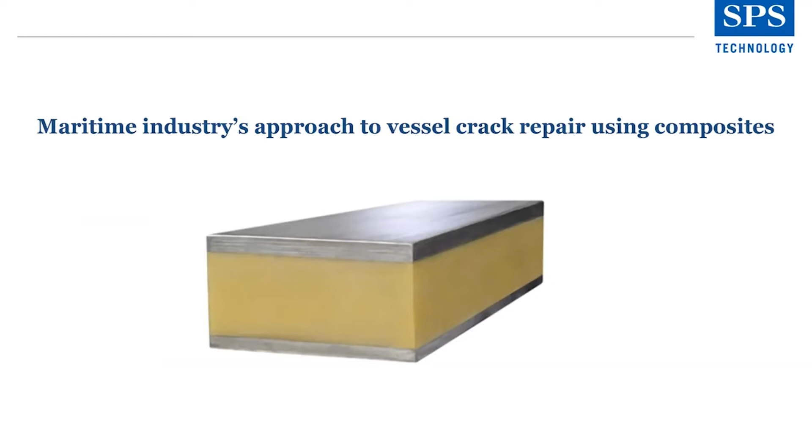Maritime industry's approach to vessel crack repair using composites. Structural maintenance on vessels is growing both in terms of demand and complexity. This requires a new innovative approach and an overhaul of decades-old approaches to vessel crack repair to unlock cost, time, environmental, and safety benefits. Repairing the cracks present on a vessel's critical structural components forms a key part of structural maintenance, which preserves asset integrity, ensures seafarer safety, and safe passage of cargo.

The global shipping fleet is aging. New stress points are emerging on existing vessel structures as a result of retrofitting and refits, work that is vital in prolonging the life of the vessel and ensuring cost-effective compliance with environmental regulations. These factors mean the demand for structural maintenance, including crack repairs, is greater and more complex than ever before.

For many years, gouging and rewelding or crop and renewal techniques have been used to address cracks on vessels. While effective, the process involves extensive steel renewal, which is costly, time-consuming, and comes with heightened risk and time out of service. With the average age of the world merchant fleet continuing to grow, as of last year on average it was 21 years old per vessel, there is likely to be increased scope for structural repairs to address vessel cracks, with associated costs and time out of service both key concerns.

Time out of service relevant to cracks in this presentation talk about hull or fuel tanks specifically. We'll examine how the combination of these factors suggests an overhaul is required in the maritime industry's approach to vessel crack repair. While repair techniques have remained static for many years, structural composites offer a cost-competitive alternative that's fast, non-disruptive, and delivers improved strength compared to conventional steel structures.

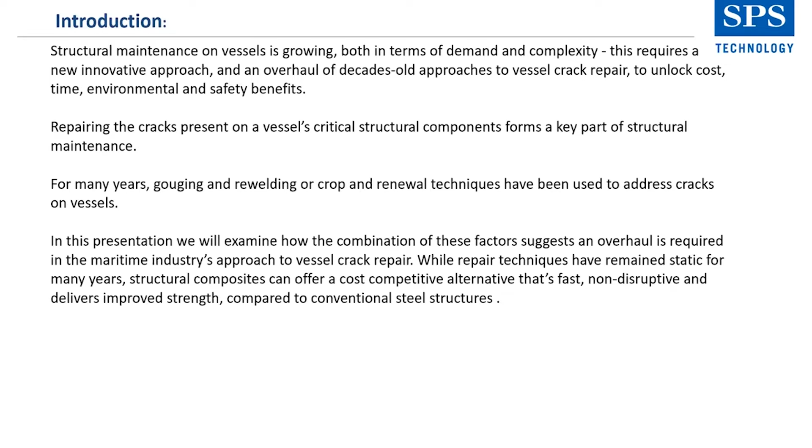There's three types that I've identified here on the slide. One is a temporary composite wrap repair. Damaged ships and offshore pipe structures can be repaired and protected against the effects of erosion, corrosion, and deterioration, using a wide range of polymer composites. This technology has been used in temporary composite wrap repair and maintenance of metal products since the 60s.

Temporary composite patch repairs feature an application of carbon and glass fiber mixed with epoxy resin or adhesive to the damaged surface. By curing, the resin hardens and permanently bonds to the surface, impregnating the fibers that reinstate the strength of the damaged part. This creates a solid new layer of material that provides full water tightness. These repairs have been around for probably about 35 years.

And then we've got the sandwich plate system, which is a fully class-approved permanent repair, strengthening and upgrading solution that has been used on marine structures for over 20 years. With SPS, two metal plates are bonded by a polyurethane core.

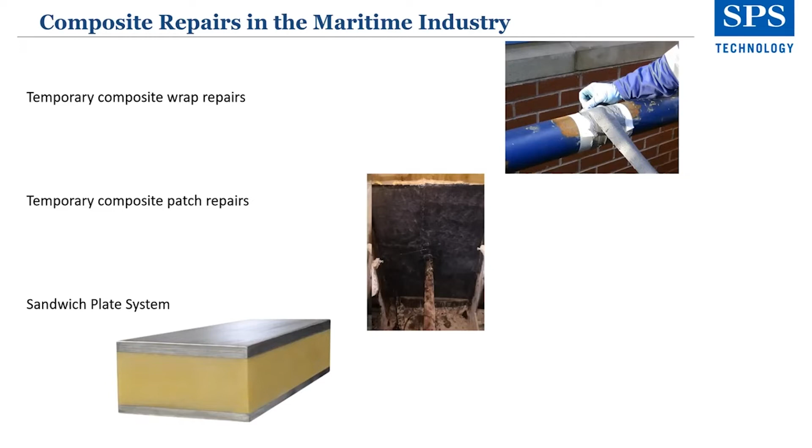Steel ship structures can develop cracks as a result of their all-welded construction or material imperfections, loading conditions, fatigue, and corrosion as they operate in highly corrosive environments. Welded ship structures are susceptible to damage during its construction and operational life. Design inadequacies, material selection, material imperfections, improper welding, incorrect fabrication, or poor workmanship are some of the probable causes for damages during construction, while fatigue and corrosion are related to operations.

These damages primarily manifest as cracks in the ship structure, either immediately after fabrication or launching, or in due course of time. Crack formation or initiation appears inevitable or unavoidable, given the uncontrolled variables involved in constructing a welded ship structure, along with other factors, including the use of high tensile steel strength. So, where do cracks come from? Cracks can develop during the ship's construction stage.

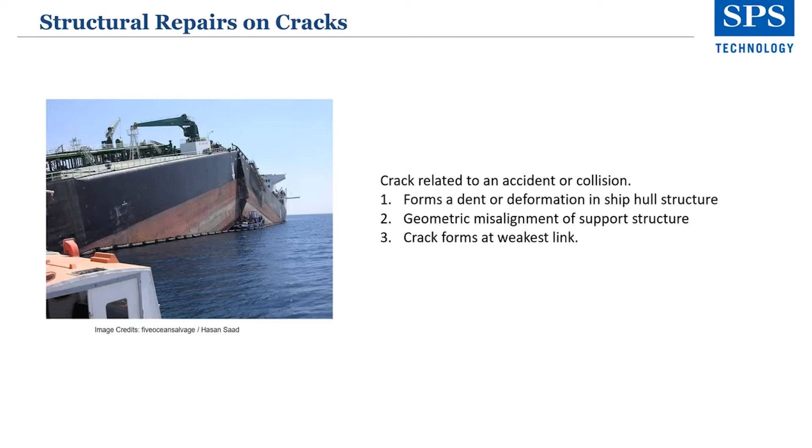The normal procedure followed once cracks are detected during inspection is that they are gouged and rewelded, followed by non-destructive examination. Okay, so we're going on to the problem with side shell cracks as an example.

Ship structures are subject to cyclical stresses due to wave pressure, ship motions, and loading conditions during operation, so fatigue is an important design criteria while designing and building ships. The science of cracks is really important as well, for forensic investigators and class surveyors.

For instance, on the slide you can see the defect crack locations are in the aft portion of the hull of this vessel, which was the original section. So this is a vessel that's been lengthened. Backing brackets were not installed in way of the side shell during the conversion or new build. On the left-hand side image, you can see where the transverse bulkhead meets the longitudinal side shell, cracks have formed. The cracks originally appeared at the bulb collar plate weld connection on the aft side of the bulkhead.

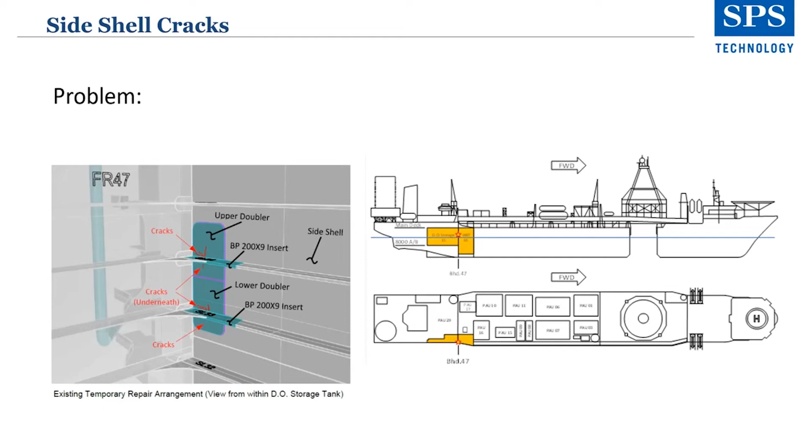Backing brackets were fitted during the repair, and an existing temporary doubler repair was put in place. As you can see here, these are photographs of where the crack has formed through the longitudinal stiffener attached to the side shell. The cracks were drill stopped in the side shell to stop propagation.

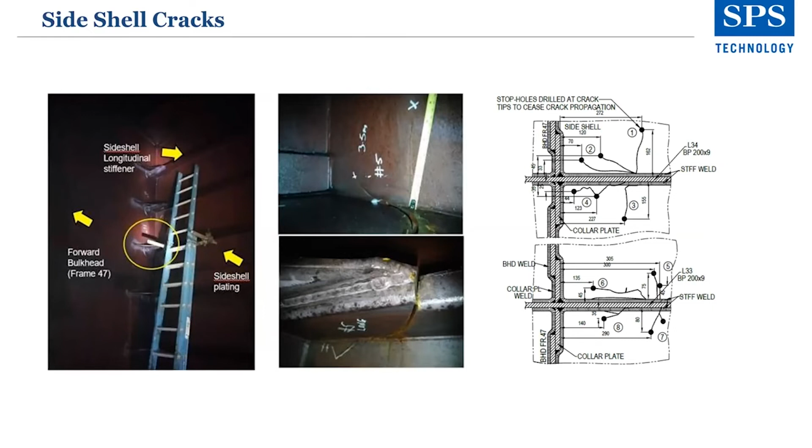So how do we go about repairing cracks in the side shell? With an SPS solution, as you can see in this image, the doublers were in place with a new longitudinal sectional stiffener. On the outside, to stop the ingress of water through the cracks, a Miko Patch was applied.

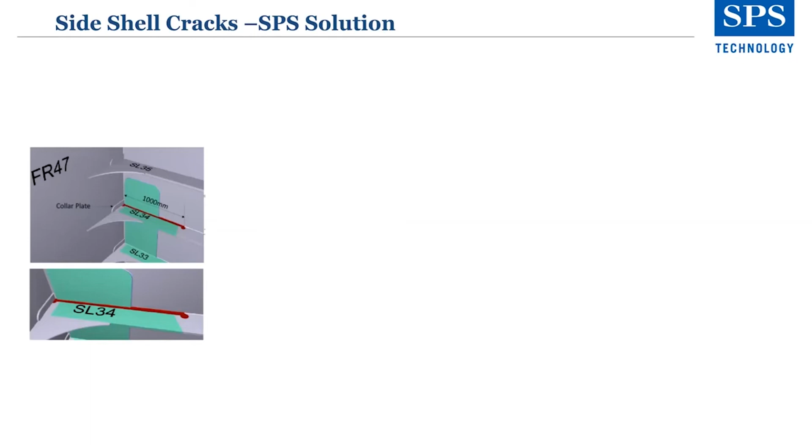Then we marked out on the longitudinal stiffener a line to be cut to try and remove the doubler to gain access through the temporary solution, to assess if the cracks had grown since the temporary solution was put in place. So we removed the upper doubler plate and lower doubler plate.

In the center images, you can see we removed the wooden bungs that were in place at the aft end of the crack arresters. We fitted new brass plugs and trimmed them flush to the side shell plating. We then ground the cracks to create a smooth open profile.

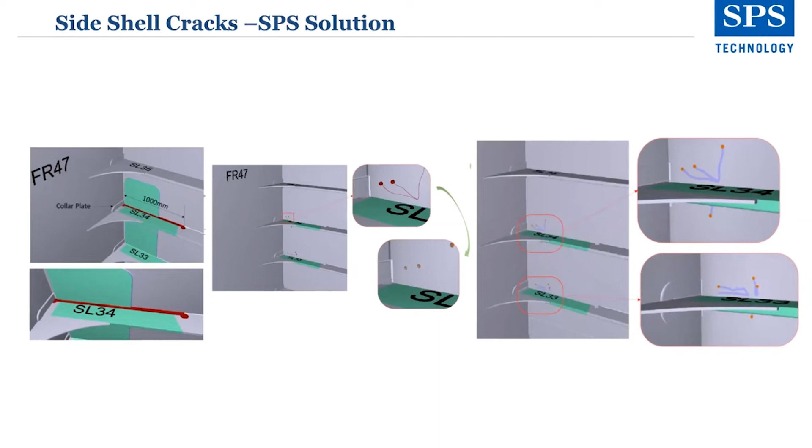After which, looking face on to the side shell from the inside, you can see over 3 bays, as we call it, where the cracks are identified in orange, and the new stiffener section has been removed, as denoted by the green.

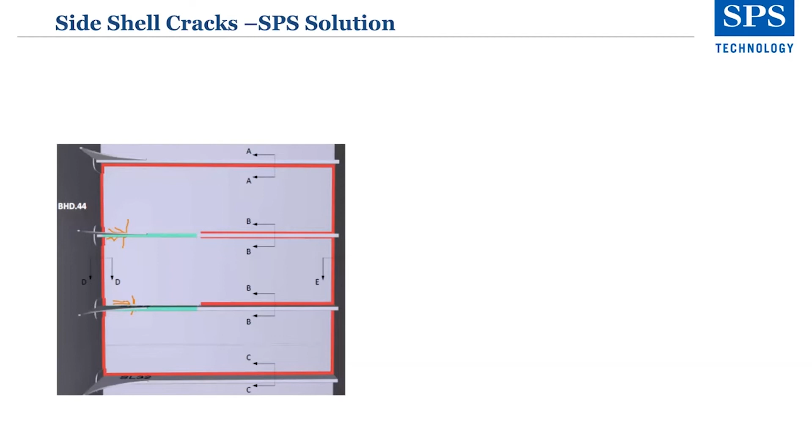So then we install SPS. We need to surface prepare the area back to 60 microns, so we prepare that and clean it. We apply moisture tolerant sealant and structural sealant over the cracks to stop any moisture coming through. We fit and tack backing bars, as you can see in red, around the perimeter of the area, including top and bottom of the web frame.

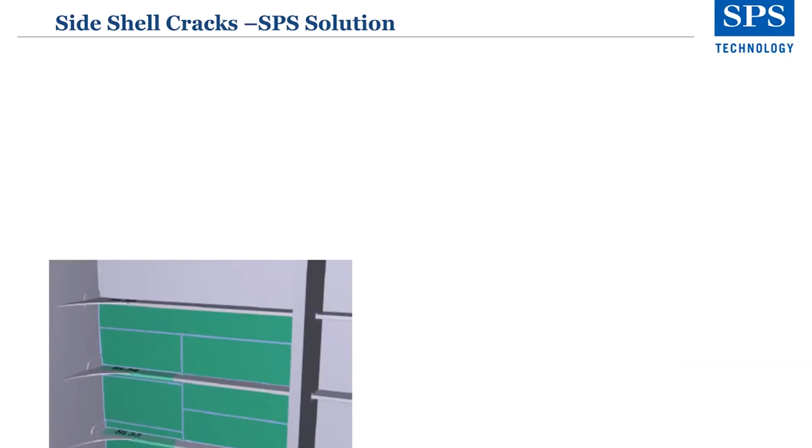Once that's in place, we then position plates on top of those backing bars, creating a seal cavity. Once the seal and the welds have been put into position, you have one formed cavity where the cracks are now inside, although behind the longitudinal stiffeners, they're inside that seal cavity. SPS polyurethane then is injected from the bottom of the cavity and fills the space between the new plates and the hull where the cracks have formed.

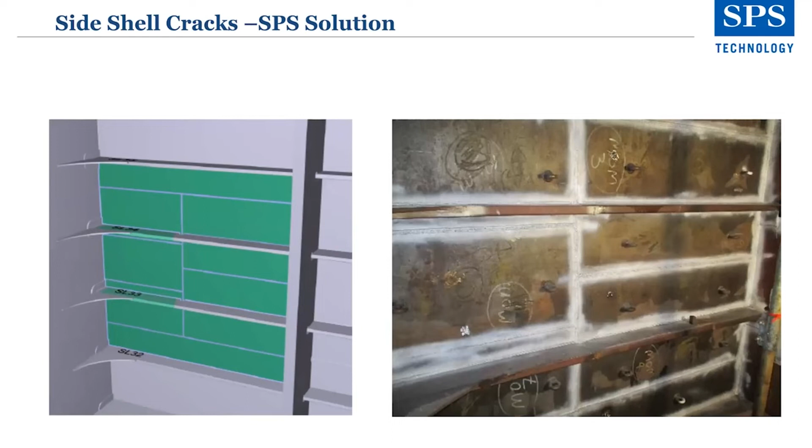Why was SPS chosen, and what was it chosen for? SPS was chosen to strengthen the area so the cracks wouldn't grow. With the fracture assessment and FEA, we calculated assuming that the diesel tank where the cracks were was full, and the fatigue assessment was performed with dynamic external pressure for the loaded condition of load cycles for 20 years. The calculated dynamic pressure corresponds to the largest stress range during the service life, 20 years.

By using SPS, the stress range decreased by 95% compared to how the side shell would be without any stiffening. The fatigue life is calculated to be 2,116 years after the SPS repair has been installed.

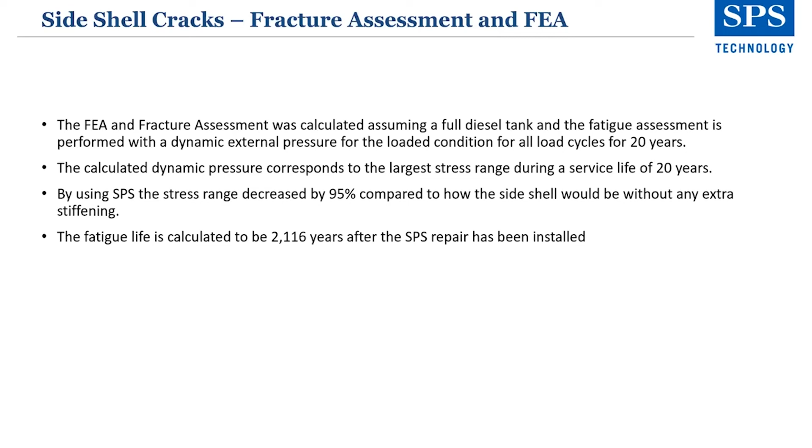So with the class society interface, they said the cracks were close to the transverse bulkhead, and the consequences with even a small crack growth was high. The cracks were covered by an SPS panel. Class wanted to ensure that the crack could not grow uncontrolled for a period between inspections. Class calculations showed that the SPS panel between the existing stiffeners contributed to low stress level in the cracks, and the fatigue analysis showed low probability of further crack growth.

The application for steel parts of the SPS solution involved a review of the drawings, checking if the material selected was acceptable with respect to manufacturing method, weldability, and material testing. The drawing review also covered acceptable details according to the rules for fabrication and testing of offshore structures.

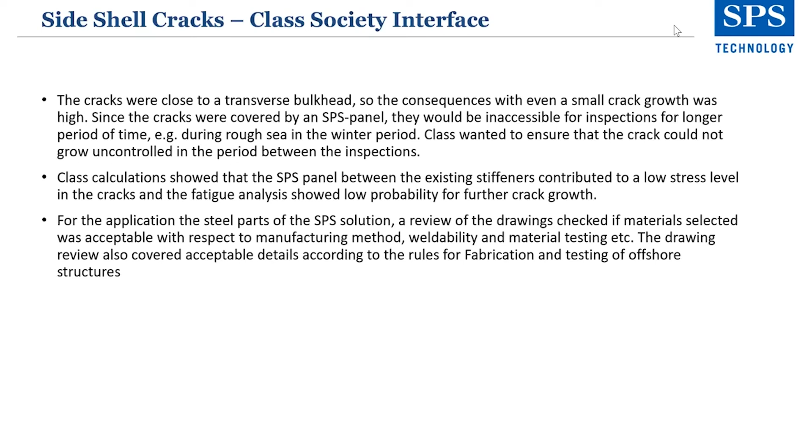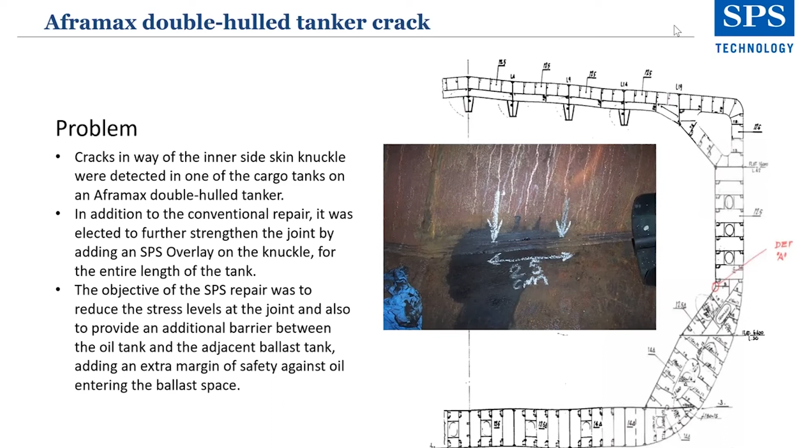The second case I brought to attention is the Aframax double hull tanker crack. This crack was in the inner side skin knuckle in one of the cargo tanks on the Aframax tanker. In addition to a conventional repair, SPS was added on top over the knuckle for the entire length of the tank. The objective of the SPS was to reduce stress levels at the joint and provide an additional barrier between the oil tank and the adjacent ballast tank, adding an extra margin of safety against oil entering the ballast tank.

So the solution to assess the service life fatigue performance of the knuckle joint, structural analysis was carried out. The effectiveness of the SPS repair was investigated through finite element analysis, using two models to represent the as-built structure with SPS. The use of SPS as a permanent repair is effective because it reduces stress levels at the knuckle joint, with a conservative assessment of 25% reduction in stresses at critical locations. So the fatigue life is improved by approximately 2.4 times.

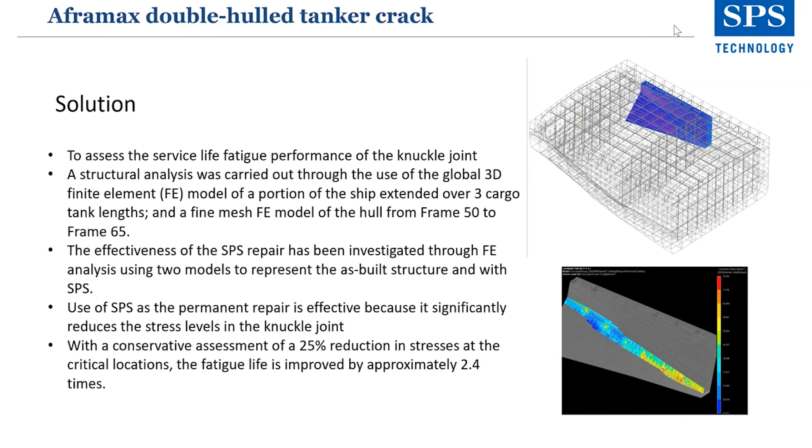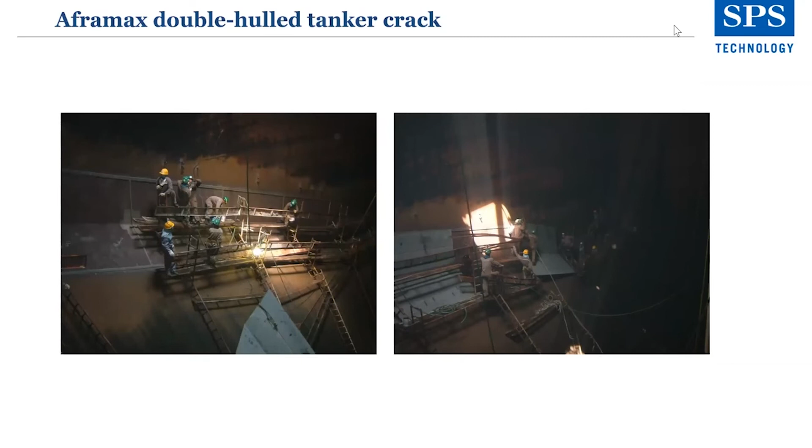Since that time, with regular inspections, there's been no reoccurrence of the cracking that we're aware of. This solution was also installed on 3 other sister vessels.

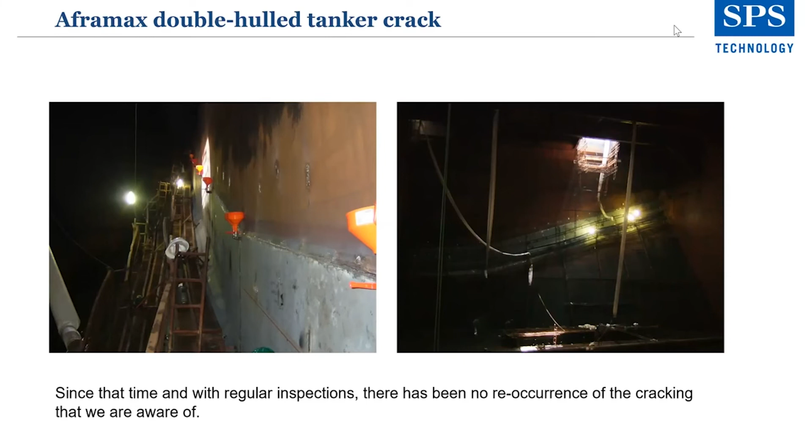The Ice Class 1A Sup vessel, we repaired cracked bulkhead plating. This project was brought to our attention by Lloyd's Register in 2013, following their discussions with the client regarding a life expectancy study of this already 22-year-old Ice Class vessel. The repair involved the cracked bulkhead plating between the wing water ballast spaces and centerline fuel oil tanks.

No single cause can be attributed to any cracks that occurred on the ship. As I mentioned before, there are multiple various issues that can cause the cracks. Cracking appears to be a result of a number of factors, compounded by the relatively long and continuous service in severe operating environments. Even new build vessels, when moving into ice regions or polar regions, due to the difference in temperature, can experience cracking.

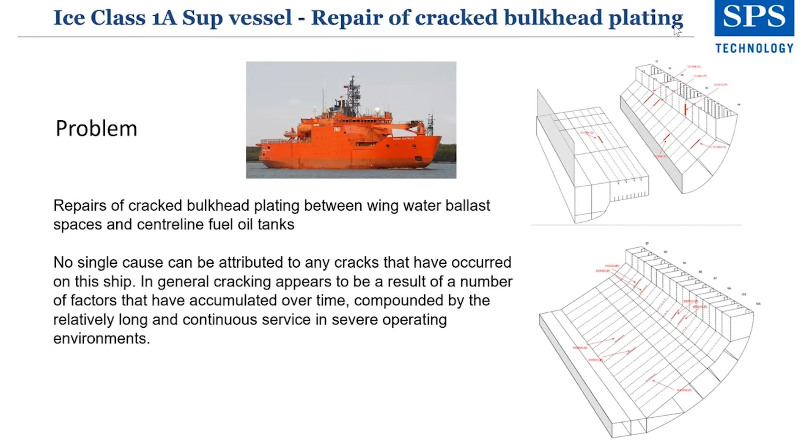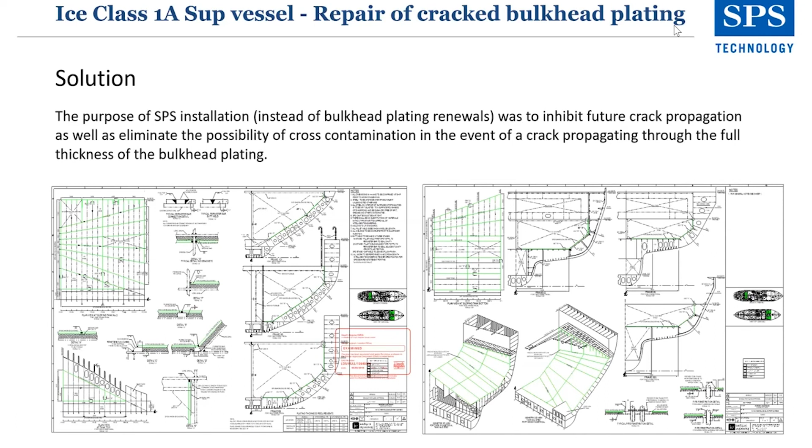The purpose of the SPS installation was to inhibit future crack propagation, as well as eliminate the possibility of cross-contamination in the event of a crack propagating through the full thickness of the bulkhead plating. And I've shown the drawings there for reference.

The cruise ship had a crack in the alleyway on deck 7. The photographs, as you can see here, this is a close-up view, and this is above the doorway itself. So the crack had propagated on both sides.

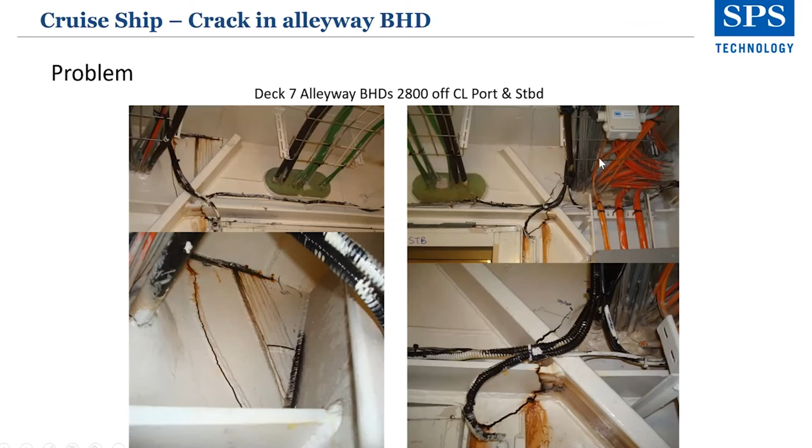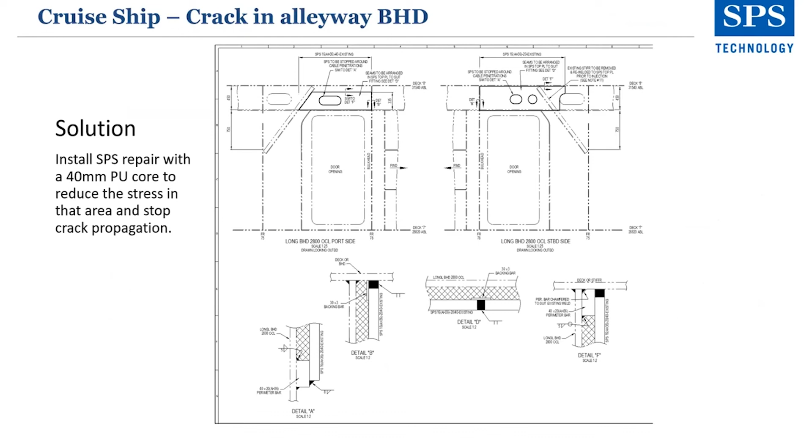An SPS was installed to reduce the stress in that area and stop further crack propagation. We didn't want the crack coming back after the repair was installed. A 40mm PU core of SPS was installed for this application.

For ro-ro ramps, we've had several passenger ro-ro ferries with tilting ramps that experienced cracking of the welds and plating at the point of attachment of the channel stiffener to the ramp plating, all related to fatigue. They'd been welded as an initial temporary repair, but a longer, more permanent solution was needed because it kept on cracking.

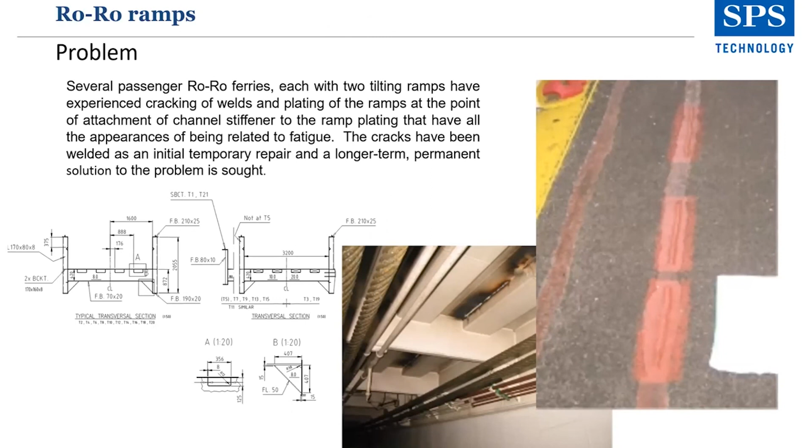The transverse flexing of the deck tends to open up the one-sided fillet welding joint, causing tensile stresses. There was substantial cracking. We did the finite element analysis and modeling, and it was due to the truck wheels and where they were positioned on the ramp.

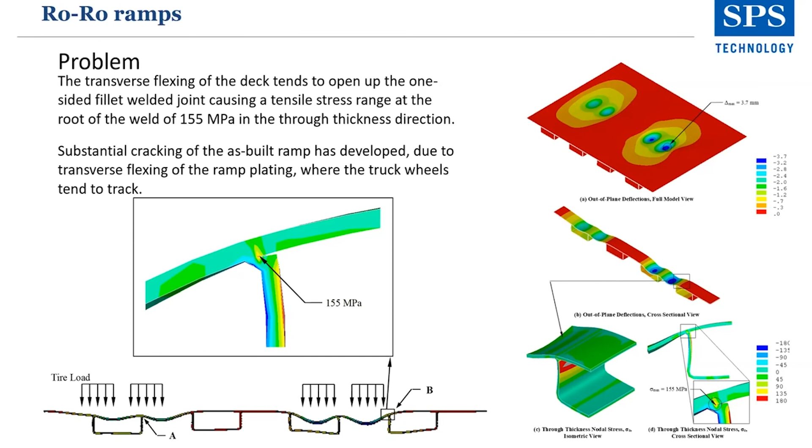So we installed SPS with a 20mm core, giving a long-term, permanent class-approved solution to the structural fatigue problem. FE analysis was used to assess the fatigue stress range. The tensile stress at the critical details was reduced from 155 megapascals to 22 megapascals by the addition of the SPS. The fatigue life of the structure, as manifested by this detail, is increased from just a few years to lasting the remaining life of the ship.

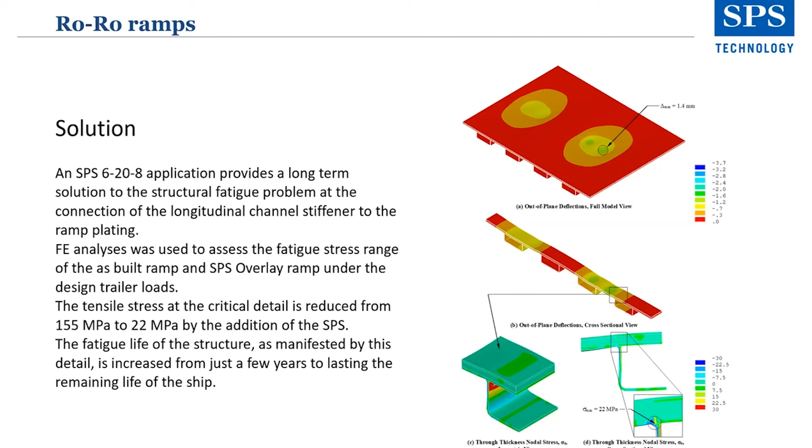For installation purposes, when we talk about SPS, I'll show a little video here that I can talk you through about how SPS is installed.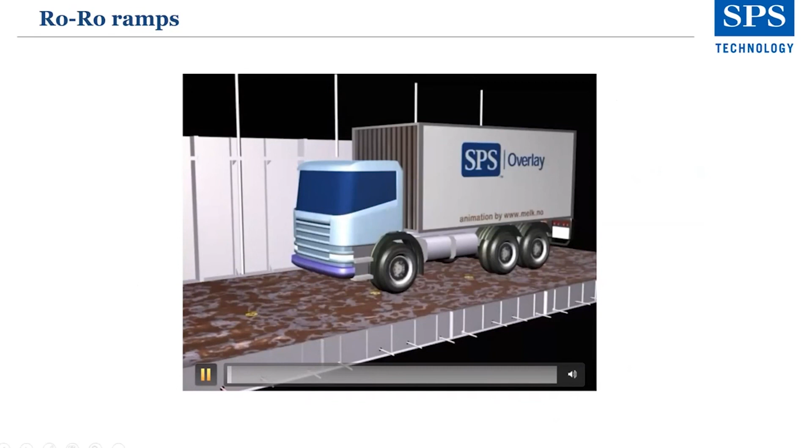This is a sample ro-ro deck using SPS overlay. We're taking one small section at the moment. The existing deck is blasted back to original steel. Any holes are closed off using closing plates. In this case, we can reposition even the lashing pots.

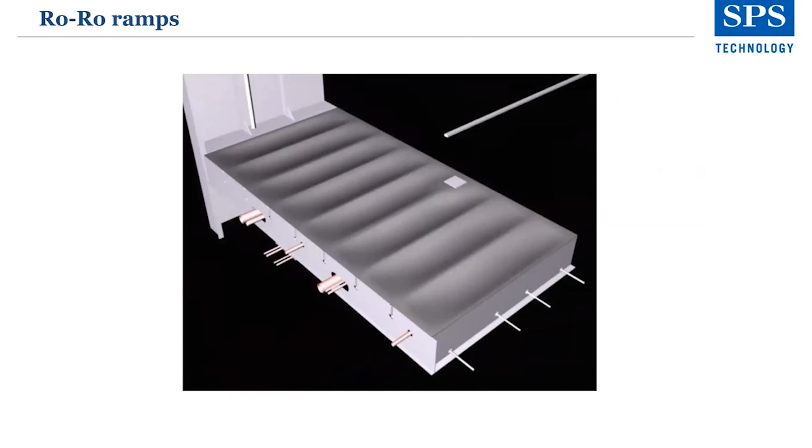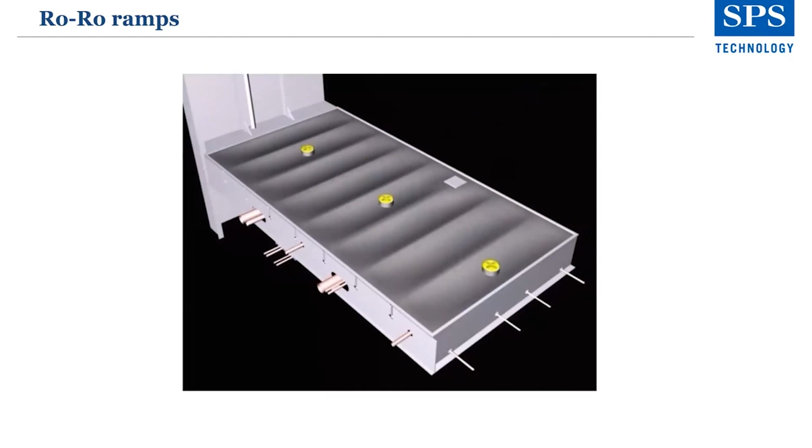Around the outside of the cavity, we weld perimeter bars to the existing deck, creating a boundary. In this instance, we've installed lashing pots to the center of the cavity and spacers to stop the plate from sagging into the cavity itself. The cavity size is approximately 10 meters by 2 meters.

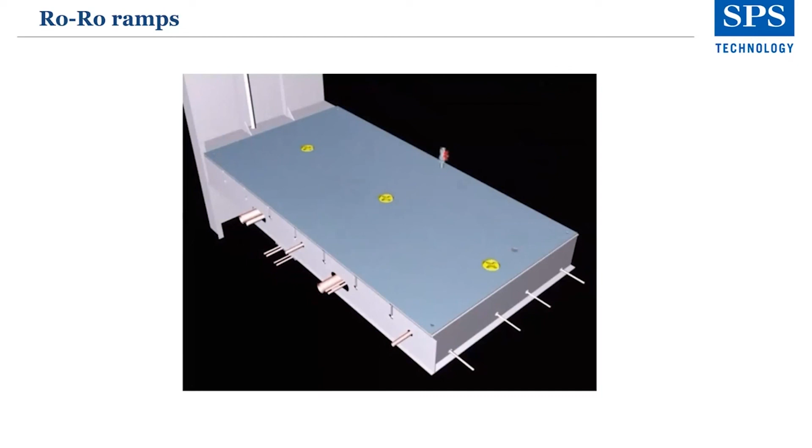The top plate is welded to the perimeter bars, creating a cavity, a void inside. In each of the corners, ventilation ports are fitted, and on top of the plate, to stop it bowing up under injection and keep it remaining flat, we put some beams that are held in place.

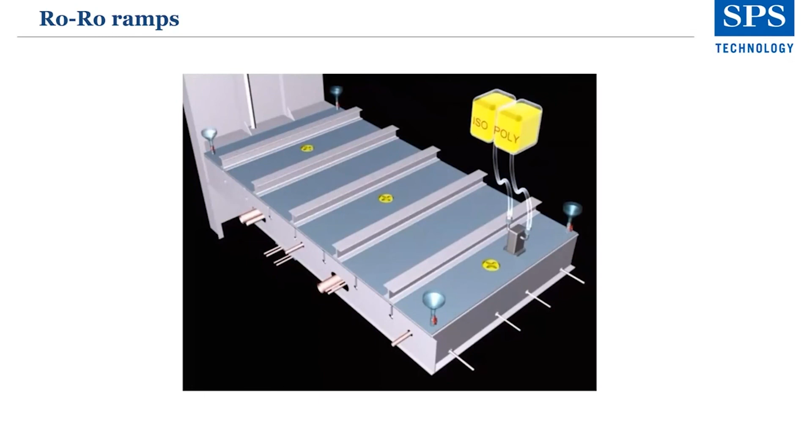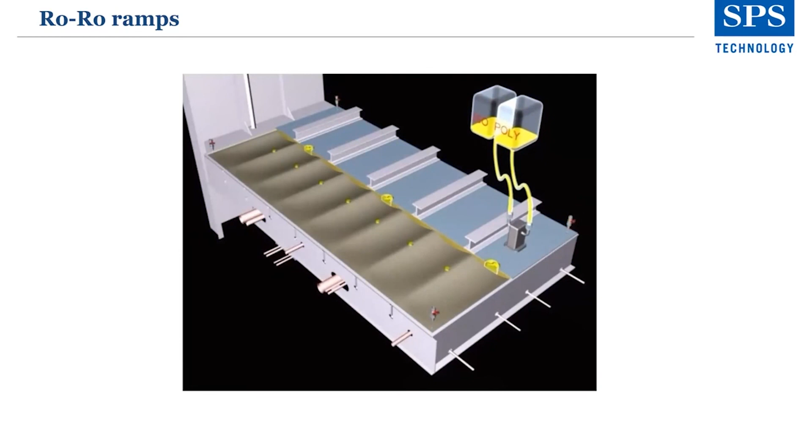A two-part chemical mixture is mixed at the lowest point of the cavity. Once it enters the cavity, it takes a few minutes to fill, and then after 10-15 minutes it solidifies, bonding the new top plate to the old worn bottom plate. In some cases, the old worn bottom plate has corroded down to 50%.